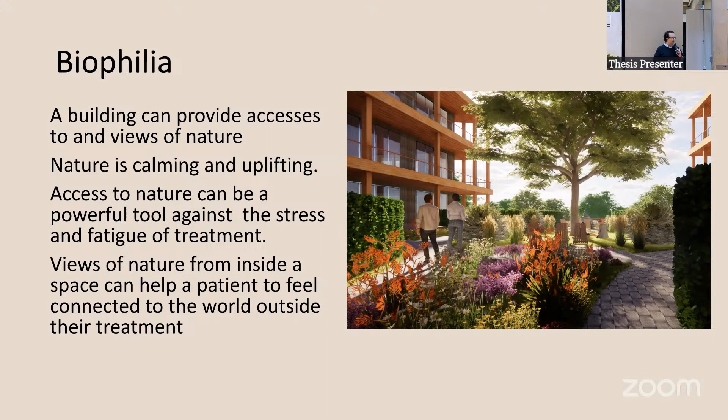We can also provide community space. Sharing your experiences with others can make difficult experiences more tolerable. Hearing about the struggles and successes of others helps patients realize they are not alone. Learning more about a disease and its effects can help a patient feel more in control.

The final thing I will look into is varied experience. If a patient repeatedly endures difficult treatment in a building, they'll begin to associate that space with pain and discomfort. However, if a space has both positive and negative memories attached to it, the negative reinforcement can be reduced.

This thesis is an exploration of a combined chemotherapy infusion center and community center for those undergoing cancer treatment. It will seek to bring together nature and community to have the most impact possible on patients enduring treatment.

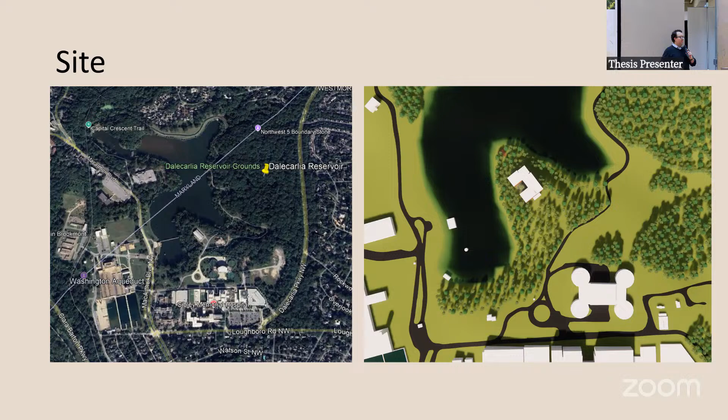This project is sited on the Dalecarlia Reservoir in the western corner of Washington, D.C. This particular reservoir has a wooded peninsula that sticks out into it, and that's the site I chose for this thesis. The building will get views of water on three sides, as well as being able to take advantage of the mature forest that already exists on the site.

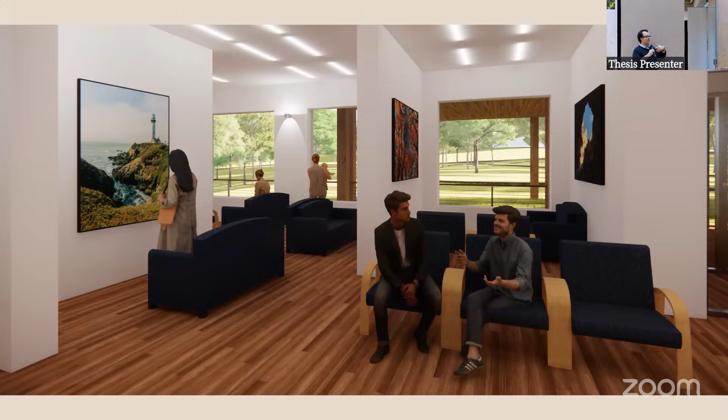The waiting room is something I wanted to be different from a normal waiting room. It's laid out as an art gallery, so instead of waiting in rows of chairs like you might be accustomed to, you can move about the gallery and see different pieces of art. You can look out into the mature forest, and sit in any kind of private or public configuration of furniture. This art right now is showing nature, but it could be any type of art donated to the facility, created by people at the facility, or rotating work by local artists.

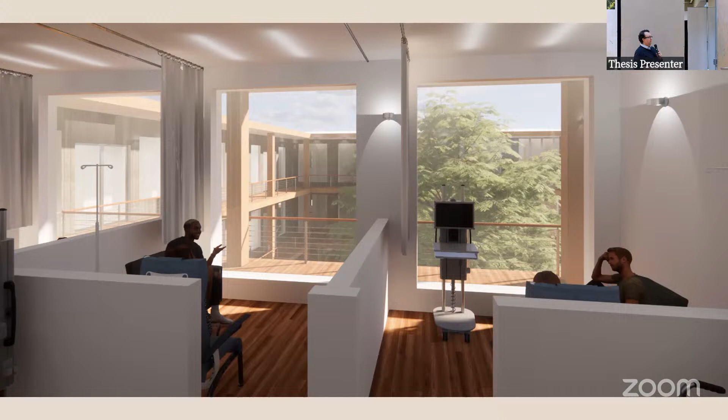You can see here that the spaces are facing out instead of facing in, like a lot of chemotherapy spaces are—out into the site, into the views of the water and the forest. Other chemotherapy units are facing into the courtyard.

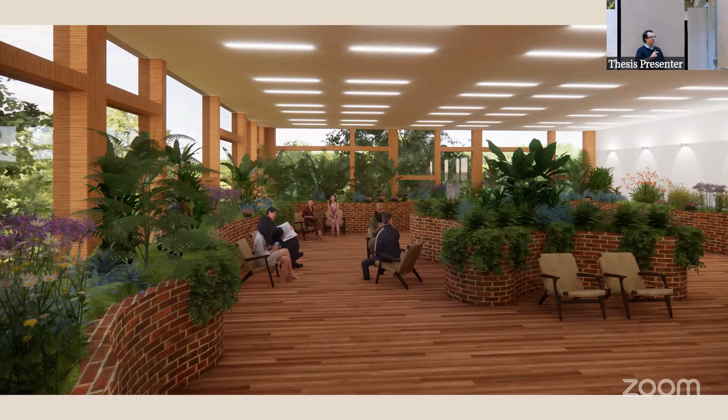We also have an indoor botanical garden, so if it's during the winter, or if someone cannot be outside at any time of the year, they'll still be able to connect directly to nature from inside the building.

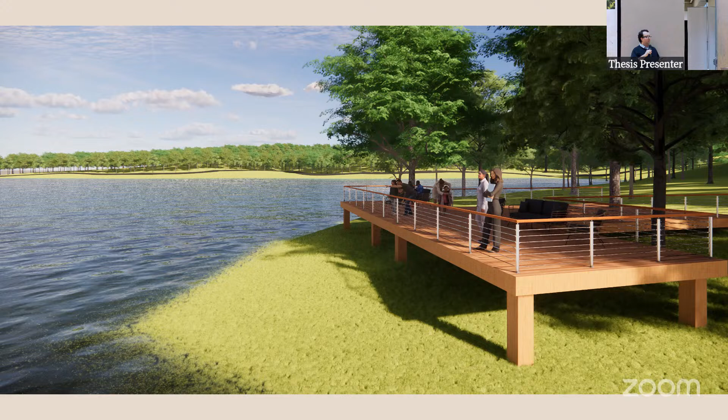At the very tip of the peninsula, we also have a boardwalk so that patients can move down there and spend time near the water.

The hope with this project is to provide a space that patients want to be in. If you need to receive chemotherapy treatment once a month, hopefully there can be events, classes, or group therapy that bring you in on other days. Maybe you come once a week, and only once a month for treatment. So hopefully 75% of the experience in the building is good and positive, and only 25% involves the negative aspects of treatment.

And now I'd like to open it up to your questions and comments.

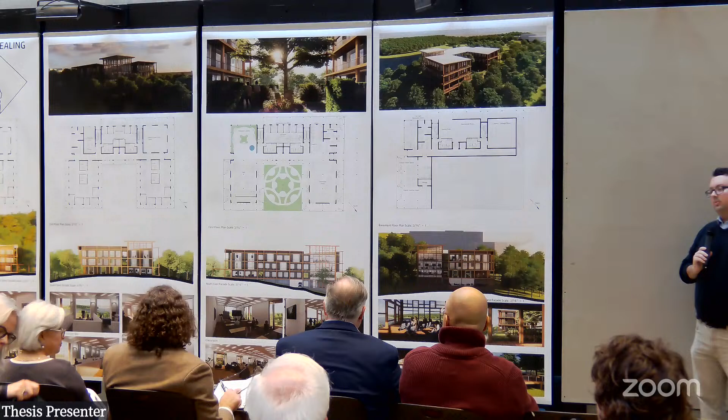Number two, I would like you to talk more about why the building looks like it does, from a planning perspective. I'd like to see some diagrams, some exploration of different ideas. You have a sort of rigidly geometric building, and I think you have some delightful things happening in your elevations, but you haven't really talked about that. And there's an emphasis on these interior renderings, which are quite good as renderings, but I don't think they tell me enough about why.

And that's the tectonics question maybe that goes to Matt's. Why does it look like it does? Why is it articulated this way? Great site, love it, thanks.

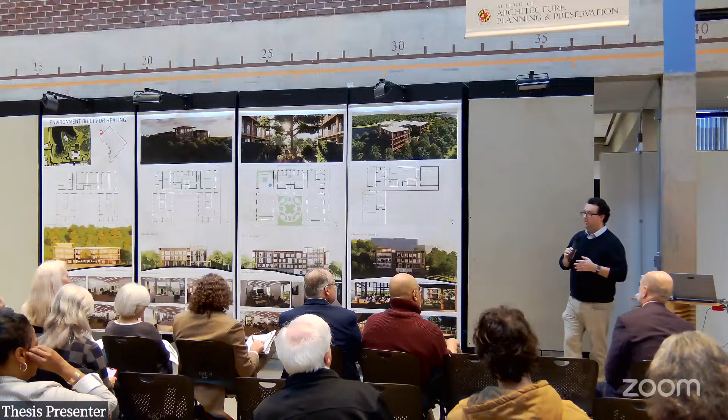In terms of my personal connection, when I was young I had a number of medical procedures, kind of minor, but it helped me connect to the idea of medical fear and anxiety. That's the main thing I wanted to look into, how to make a space that would reduce medical fear. And coming over my research, the thing that sort of begged to be addressed the most was chemotherapy. If you have to pick any one treatment, the one that has the most reinforced medical fear is chemotherapy. So that's the idea, to pick the function that can have the most impact.

So, the exterior expression - the building was designed from the core out. The idea is that there is a porch that runs all the way around the outside of the building so that you can come out and spend more time in nature from the majority of the places in the building, excluding the chemotherapy area - there's not enough room, it's a little bit larger than the other spaces.

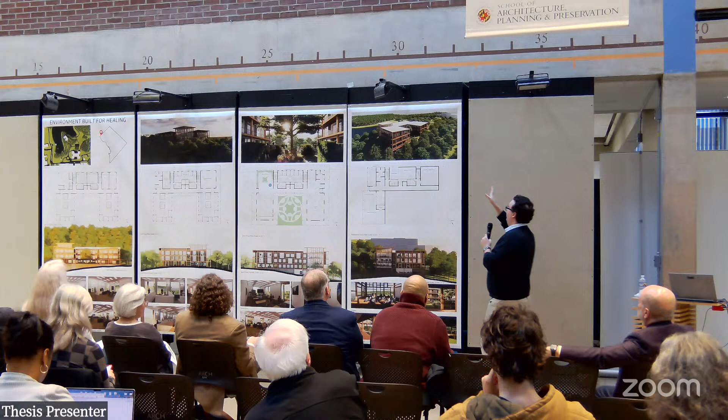The other thing is that the facade has a porosity to it, the way that there's the eaves and the columns. It creates an additional zone. So you have the nature, and then you have kind of a mixed zone, and then you go into the building, which I think helps mix the space instead of just having nature and then it ends at the wall. It kind of helps as a medium to bring the nature into the building.

Okay, I have a question for you regarding the typology. Is this a new typology that you're trying to introduce? A lot of the experiences I've had with people close to me, you go to the hospital to have your chemotherapy. Is this a new typology you're trying to introduce to ameliorate that experience, to make it better? And if so, did you actually talk to people? Did your research include people actually having chemotherapy, so you could design from that experience how they should be treated, and whether they want to be in open spaces next to somebody else going through the same treatment?

Yeah, so I spoke to a number of people. I didn't speak to somebody who's undergoing chemotherapy, but I spoke to a number of people who had family members who underwent chemotherapy, and they would be in the spaces with their family members and help them through the process.

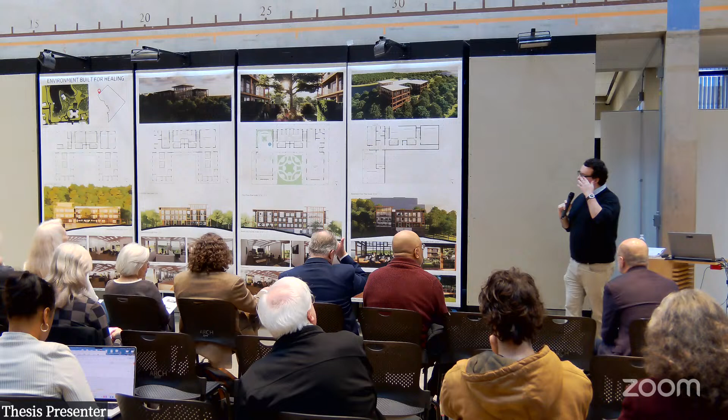And again, I got a lot of help from Robert Sands at Wilmot Sanz, whose firm designed two cancer facilities, both for Inova. One is the Schar Cancer Institute, which is a large medical building. And they also designed Life with Cancer, which is a very residential looking building that is just about the community spaces - they hold classes and community gatherings, this sort of thing.

So he had designed both, but he had not combined them. That is the new concept I'm bringing, the combination of these two things, as I discussed before, for reducing the negative reinforcement of having negative experiences in the space. I'm hoping you can have negative and positive experiences in the space to reduce the stress, so when you come to the building, you remember positive things and negative things.

And as I talked about before with the site, it's right near Sibley Hospital, and they have a very advanced cancer wing as well. So they can work together - they can be referred out to this facility from Sibley.

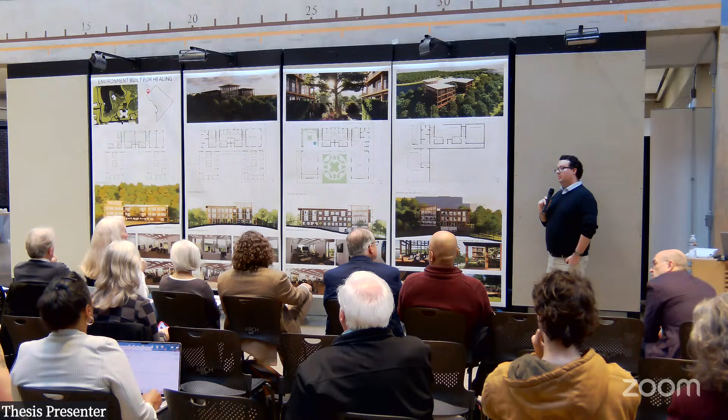Thank you for your presentation earlier. I will second something Bill said about process and diagrams. Yeah, they're beautiful and they tell a great story. I strongly recommend all students to not be afraid to write alongside your beautiful renderings and finished plans.

One thing I would have loved to see was a slightly larger pull-out, perhaps a regional view of where this location is, to get a better understanding of a patient's approach to the building and what's surrounding it. That anxiety sometimes starts before you even get to the chemotherapy chair, on that drive there, both for the patient and the family accompanying them. I'd love to have seen more diagrams on that approach experience, from the secondary streets, are you driving past the hospital, this large Sibley complex, and then coming into this more quiet, secluded area. Just something to show how those emotions someone might go through to get there.

And then also, getting to that front door experience, what is that truly like once you get out of the car and you're coming into the building? I see what appears to be an entry vestibule there by the check-in, but I would love to really see what that experience is when you're truly stepping through that threshold, right, from 'okay, I'm here, I'm checking in, let's go.'

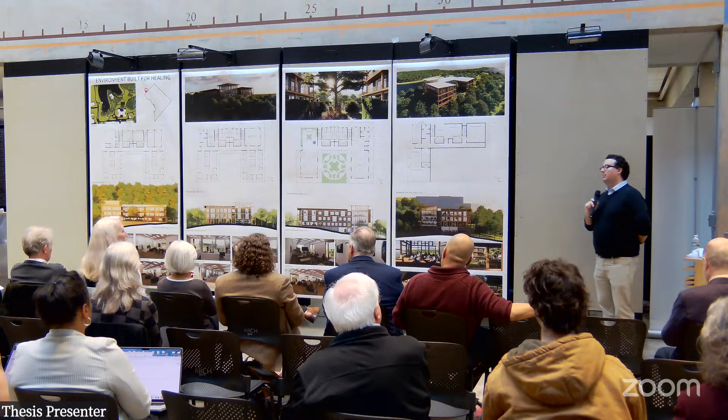In terms of the textures and the surfaces within the building, the main biophilia aspect is just the exposed timber structure. The remainder would be the different art placed throughout the building. I did try to work with some color in the chemotherapy bays for a while, but I ultimately decided that white was what was working best.

Paul, thanks for the presentation. If I'm looking at this one, I'll kind of buy it as this rather Schinkelesque palace in a wilderness. Would that it were so. However...

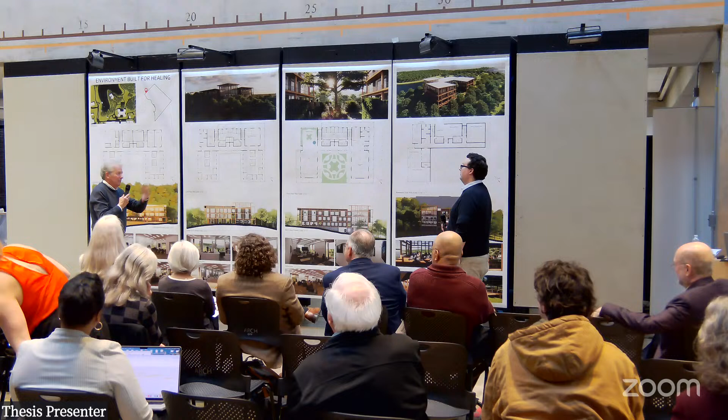I'm kind of interested, but I have a huge number of questions. I think it's important that you have an evidence base that allows us to be inherently sympathetic to the idea that there's a community of patients with forms of cancer who are prepared to allow a certain amount of intrusion into their therapy. Because I think the way individuals react to having something alien in their bodies is going to vary enormously.

Now, apropos of that, this is a kind of Beaux-Arts building. I know the facade is telling us something different, but if you look at the plan, it's got a bilateral symmetry about it, possibly slightly too symmetrical. Certainly if you're looking at the variation in how patients are going to react to cancer, surely there's an argument for saying there needs to be more diversity in the treatment rooms to accommodate the way different people react to this colossal intrusion on their normal lives.

I think that needed more thinking through and more consideration, because the person who may have no problem with a hip-height partition in the next space, there may be a person who thinks, I really don't want anybody witnessing this at all. I don't mind the idea of going to a centralized facility to be treated, but I don't want anybody to witness it. In that sense, I think the plan needs to be more nuanced, the section needs to be more nuanced, to accommodate that diversity of reaction.

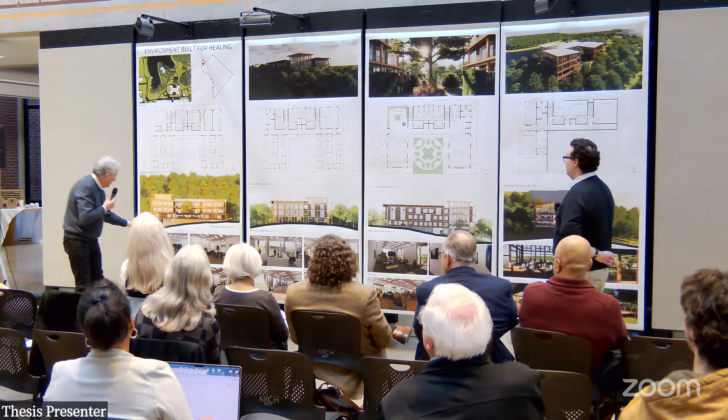Now, I get the water on three sides thing. What I don't get is the orientation. I actually would have flipped it through 90 degrees. There's a reason for this: when you look at the longer facade, it creates these areas of slightly nebulous wall here and here, which you wouldn't have had as an architectural problem to deal with if you'd flipped the thing.

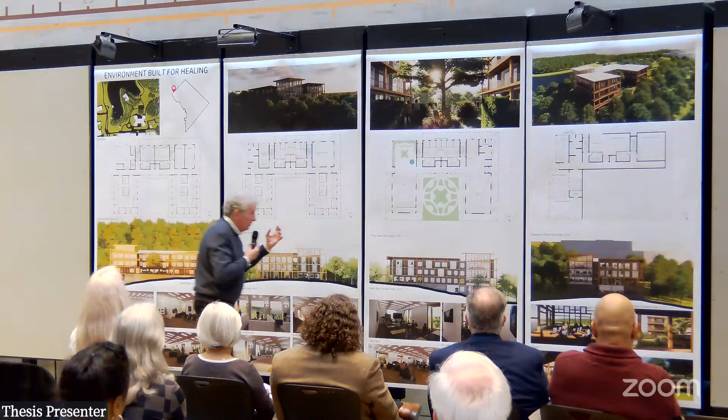I love the idea of immersion in nature. It's a wonderful concept, but you have to be kind of brutal in convincing us that these patients are immersed in nature. Putting it in a forest isn't quite enough, that's sort of like 6.5 out of 10. I think the way in which nature enters the building has to be more assertive. There's a danger that if things are only in planters, it kind of looks like the lobby of a corporate bank. It's probably about allowing nature into the building, but also orchestrating the views out by cutting into that forest, creating avenues.

You know, I'm English, you guessed. We created a vocabulary of the mansion, the stately home and the grounds, and the reciprocating landscape, that external landscape and the internal landscapes of the building. I think you needed to do more with the forest in terms of both sculpting it and allowing it into the building and adding to it to enhance that experience of immersion in nature.

Sorry, these aren't questions, they're observations. No, I appreciate it.

Thank you so much. The business of flipping the building is an interesting observation. I have the same impulse, principally because I think it would speak to the kind of layering of the site towards the water, that you come in and there's a very public side on one side of the courtyard and a much more private side on the other. The way it works now is that the entry pathway is a kind of line of fracture that suggests an equivalency between the two sides.

But in actual fact, I think the site is highly layered, from a very ordered system of Sibley and all the ER stuff in the backside there, to this natural business of the reservoirs. So I think that would have some benefit too. It would also help clarify some of the locational issues of things.

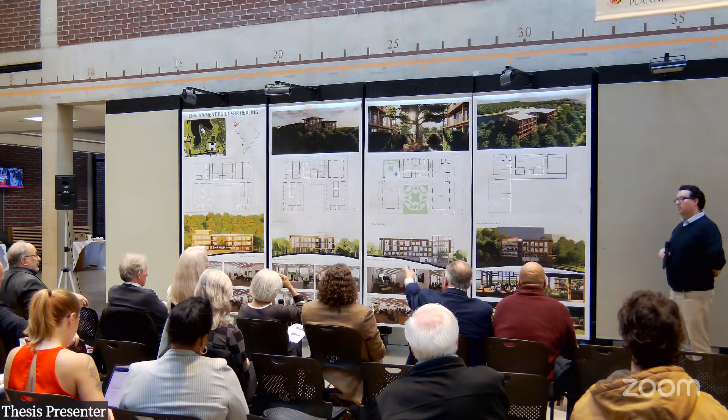A site plan would have been very good to see, to show that process and the experience people go through before they get to the entrance, and then maybe having a very welcoming entrance, which is not just the desk.

Maybe that's where you start incorporating some biophilia, some greenery, so people start to feel relaxed inside the space. Similarly, did you talk to people who received the treatments? Because I don't think they would want to be alone. You told me they are with their families, but in those little cubicles, they're alone, they're not with their families.

Sorry for getting here late, but just a quick look at what you've done reminds me of what Herzog and de Meuron has been doing with healthcare. That's a firm that became known for museums and art-related projects, but a lot of their work now for healthcare is mass timber construction, porches, areas where patients can go out, and how it embraces the landscape, especially this site you've selected.

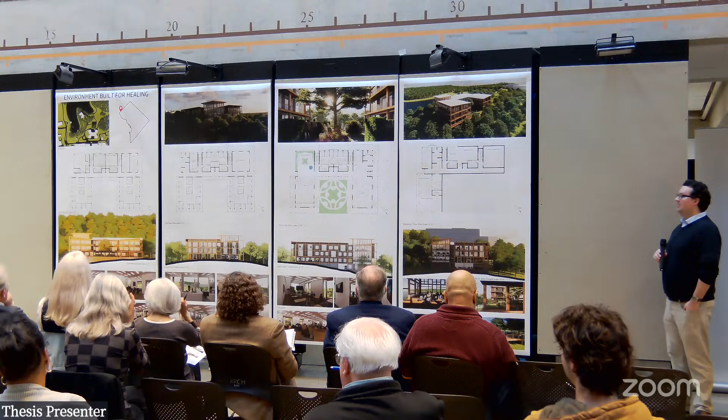Hi, Paul. Hi. First, I'll say that there's something really handsome in the fact that you tried to be very rational with how the grid sort of begins to organize itself on this site.

I note that when I look at the southwest facade and the northeast facade, I realize there's quite a bit of topography change. I wonder, since you didn't present your building sections, if there was an opportunity for this building—I don't work in healthcare, and I understand as few levels as possible might be better to get patients around quickly—but I wonder if the building could have stepped down or leveraged this topography differently. You've got 3 floors and 3.5 floors, and it could as well have been a flat site, and this solution probably could have been plugged in somewhere else. So that was just one thought.

The other thing, I'm closest to the 3rd floor plan, so that's the one I see the most. With the balconies, the earlier comment—most of the treatment rooms do not get to use that balcony, but maybe 1 or 2 rooms, the classrooms and therapy rooms, can. So teach me a little bit, because I think it'd be a little weird for me to be in one of those treatment rooms and see somebody walk back and forth. What were you thinking about the patient experience?

If you help Paul, I will take you to the club for lunch. And that was, for a lot of people, extraordinary. I guess it's all rubbed off on me now.

It's a normal thing. I would appreciate it if you would follow up with Rob and thank him, because I want to stress that series of encounters with Rob in September and October of this year was a huge game changer for Paul and his thesis.

Paul started off, he did his thesis prep semester in fall of last year, and he arrived at the thesis semester in spring with a site that was like a 300-acre park site north of here, which was ill-advised on the part of the faculty who critiqued him in 790. I'm being blunt. They should have done a better job narrowing down the site, because he could have spent the next two years just dealing with the site.

We arrived at this hypothetical site as a way to engage a pre-existing facility. It is in my mind that Hopkins would build this. Some donor would build this as part of the Hopkins treatment plan, and this would be part of the Hopkins facility at Sibley.

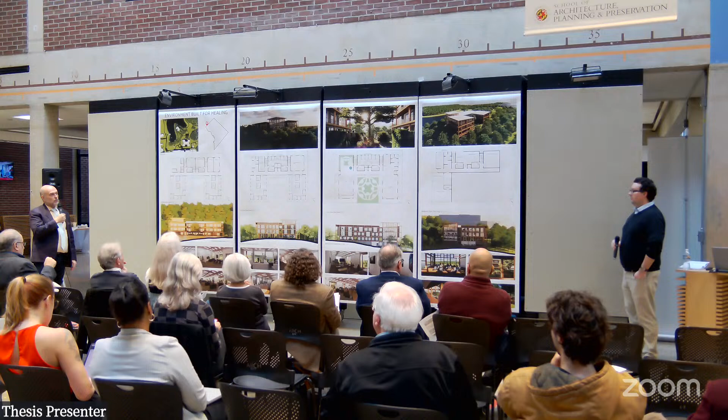We are going to turn and face in that direction, and our next presenter will also have a theme about healthcare.

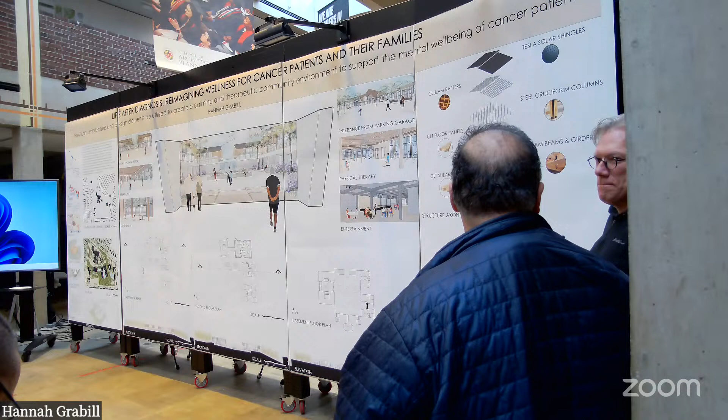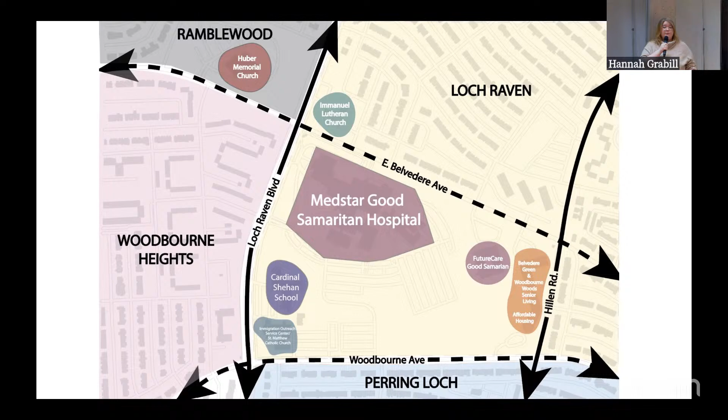But then you see this figure ground, and there's this huge mass in the center of this beautifully dense area. For me, the first thing I thought was, why can't we densify that? So instead of just placing another big mass here, my first thought was, let's go big, medium, small by densifying this area. I also did some analysis of the surrounding buildings—yellow and kind of yellowish representing residential—really showing how it's mostly residential with this big block hospital in the center.

Then I wanted to dive deeper, looking at the program of the site, seeing what's around, what program already exists, and how I could add to this site. We did find that the cancer area is brand new—they just built it. However, the spaces still feel kind of cold, white, and sterile, and we're trying to strive for a different way of designing that can stray from that.

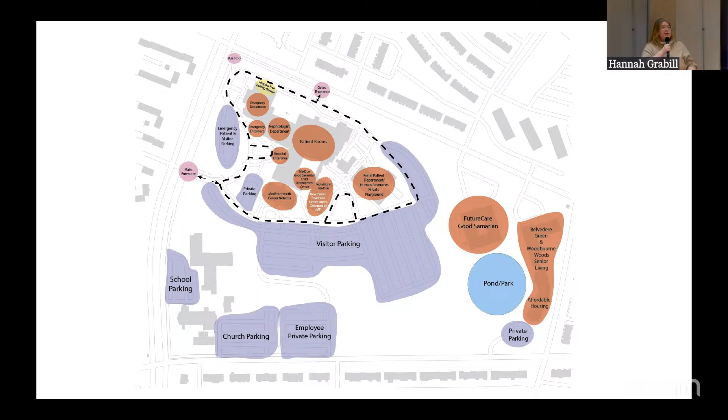Before I start digging into the project, I wanted to walk through it using focus groups, so you can put yourself in these people's shoes. One focus group coming to this site is an inpatient named Adam, age 39, whose cancer type is leukemia. He's coming to the site to receive treatment in the new infusion building, and he's been in the hospital for 4 days.

Then we have focus group 2, Aria. She's an outpatient, 23 years old, and her cancer type is gynecologic cancer. She came to the site to receive physical therapy and has come with her family support.

So talking about the first floor, the program really walks through different program types, mostly thinking about mental spaces, physical therapy, directory, and treatment spaces. I just realized I did not include the labels, but I can explain them thoroughly.

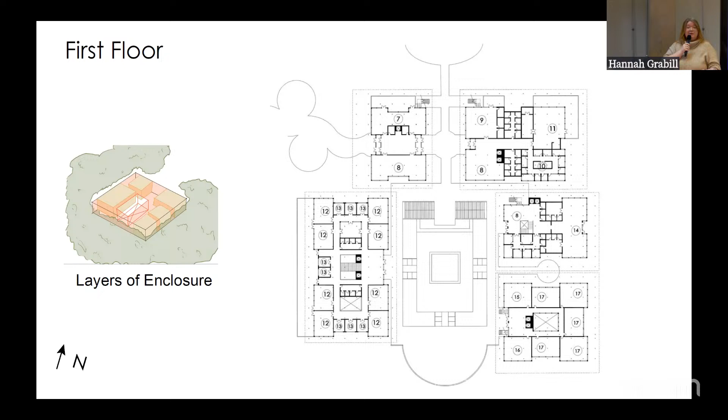And then something else I included was house living. So temporary housing was really important, especially for people staying in hospitals for a very long time. Considering the fact that we're right next to a hospital, I think it would have been great for families to have that option to stay right there in case of an emergency.

So on the second floor, we're walking through more of those spaces of infusion. I wanted the infusion spaces to feel like you had a choice. Usually when cancer patients go get treatment, you only have one choice and you're sitting around other people also getting infusion, and it's a very stressful situation. For this new infusion space, you would have an option of either an open floor plan, a cubicle, or your own separate space. But all of those spaces face outwards. Even the physical therapy and mental spaces always face towards the vegetation.

And then the last floor is the interesting one, with that big perspective in the middle, our beautiful public space. The basement floor is about family spaces. Usually during cancer care, family is kind of the last thought because they're usually in the waiting rooms waiting for them to get their treatment. It's a very long process, and it can be very stressful for them as well. So by including spaces for the family, such as entertainment spaces, a food court, and different programs for maybe teenagers to come and hang out, this allows them to not just have to wait in a waiting room. They can go and enjoy themselves while their family member is getting treatment or therapy, whatever they're here for.

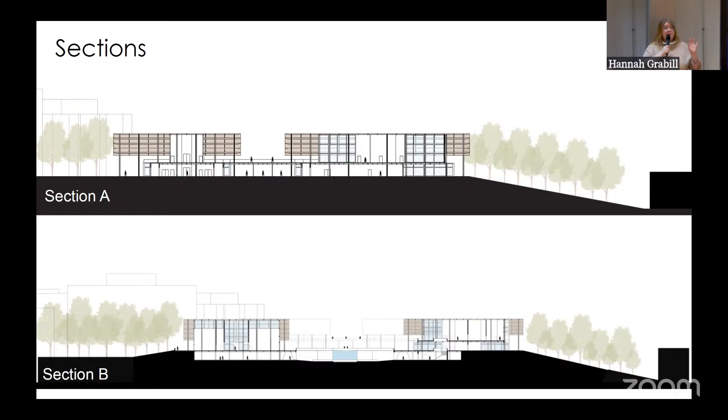And here's that section, looking at that gorgeous big space in the middle, cutting into the groundscape, and those buildings with the canopy roofs extending outward.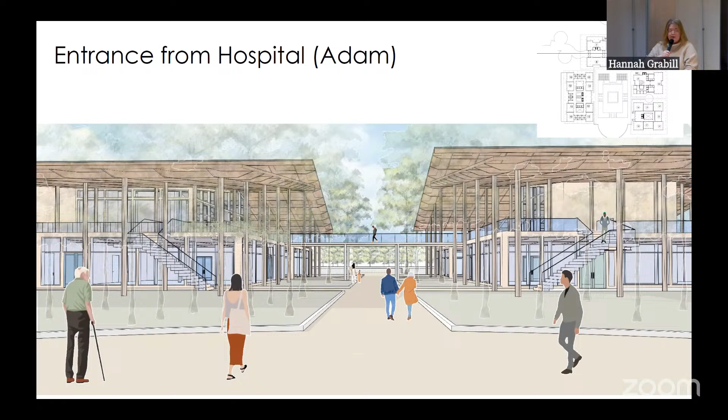Next, we have the infusion space for Adam. This is what I was talking about with having those different options. You could have these half-walled spaces that are more open plan, facing towards nature. Or you could have cubicle spaces on the side, and behind those would be individual rooms that are still open but more private so people can't hear you. Within the space there would be nurse stations so patients always have that look-see access to a nurse if they need it.

Next, we have the meditation space. Through research, meditation has been shown to really help with stress. It's one aspect of the mental building, which includes mental therapy, group therapy, meditation, and other varieties and choices, because everybody's different and uses different coping mechanisms to calm down. Meditation is a great way to ground yourself, especially after receiving treatment.

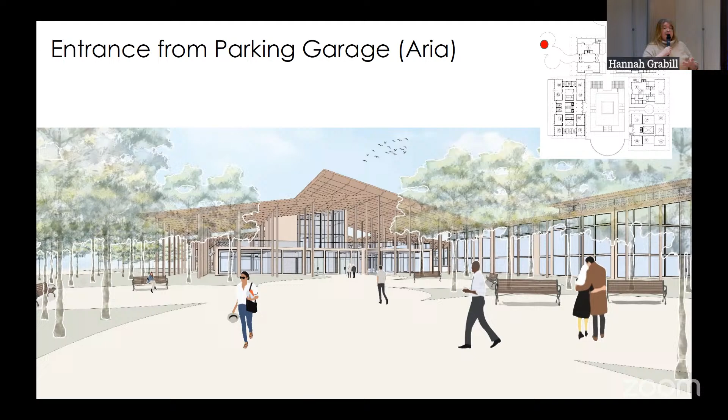Now we're going to move on to Aria. Aria is our outpatient, coming from the parking garage that's now provided on site since we're taking parking spots away. This also acts as a threshold, but now we have nodes on the side for people to sit and enjoy nature as they walk into the site, taking their mind off why they're here and focusing more on enjoying the space itself.

Next, we have the physical therapy space for Aria. Anything dealing with therapy always faces towards nature - that's always what you're looking at. And anything to do with waiting on site, like waiting rooms and terraces, looks into the family space in the center, so while waiting you can remind yourself it's going to be okay, I have my family here. It's going to be good.

Last but not least, the big perspective of our family space, the heart of this site. By making this family space the heart of the site, it reminds us that family is kind of the reminder to keep us going, for cancer patients to keep fighting. It almost inspires and empowers them to keep fighting through their battle, and that's why it's the most important perspective here. That is it for my presentation, and I look forward to hearing your comments.

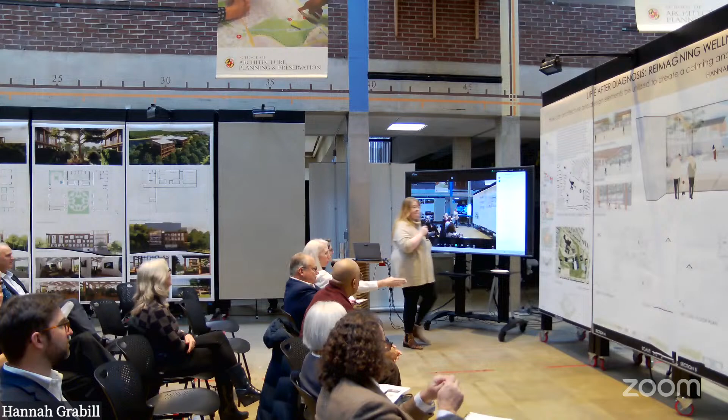Thank you, Hannah. Oops, I went. Here, one second. Sorry, I'm just trying to relate that last perspective that you showed. Would you mind coming out? Is that from the bottom page looking up into your open space, that last vision you showed? So if we go over to the ground, you're basically looking from underneath the bridge, looking outward. There's a canopy right above you that kind of wraps around the entire space with spaces right underneath as well. But you're at the very end, looking this way towards the stair.

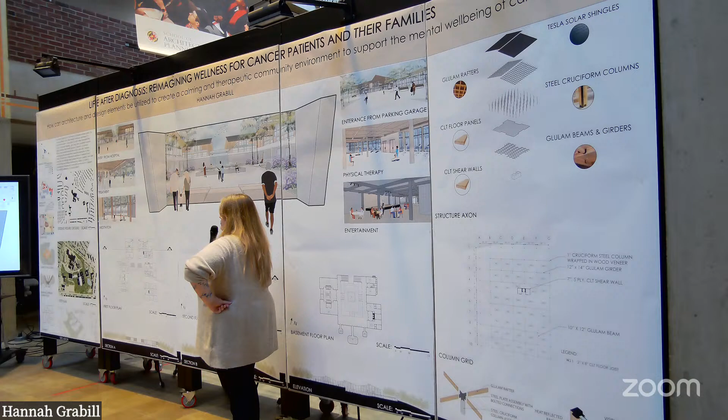So if you're Adam coming from the hospital, or Aria coming from the parking garage, you're coming in at first floor level? Yes, that would be there. So if you then turn to the open space, you're actually up above? So do you see that space at all as you're coming in, or do you have to progress in and make your way down? I just want to make sure I understand your section here. Yes, so this space would be something that you would go to yourself - it wouldn't just be accessible from the entrances. We have two options: either taking this grand staircase that's attached to this big water fountain, incorporating that water feature to calm them down, or if you have other needs and aren't able to take the stairs, we have multiple elevator options through these three buildings that you can go down to that level as well.

I like a lot of what you're doing here, the spaces and the way you've placed these buildings in the landscape. But I would appreciate it if you could get more physical for me - just show me exactly when a person comes in a car, I come through here, this is what I see, and then I decide where to go, and I have these options. When I come from the other side, whether it's Aria or Adam, this is where I see and where I can go to other things, because it will make me understand better how you organize these. I do like the spaces that you have, I like the way that it was sited, but I'm missing the people part of it. Yeah, okay.

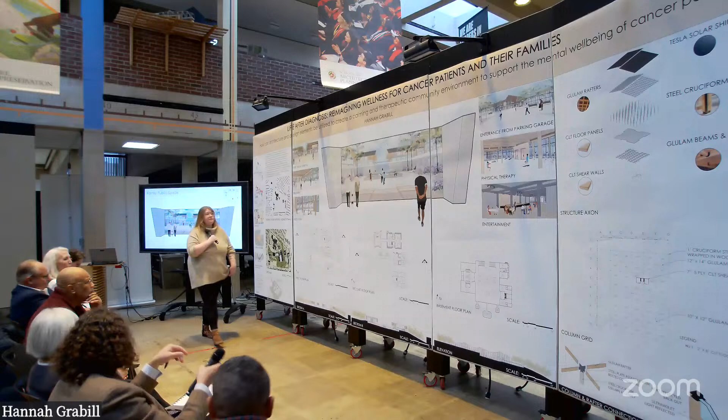Were you going to describe that? Did you want me to? Yeah, I think it's a good request. Sure, yeah, show us how to get there. Did you want to walk through with Adam or Aria? Do we have a preference? You choose. All right, let's take it with Aria a little bit.

So we're walking from the parking garage right over here, which you can see from this little axon. Once you walk into here, you see a bunch of little nodes on the side where you're able to sit, and you walk right into the directory building where there will be a desk right here where you can ask which building you need to go into.

For her case, she needs to go to her physical therapy appointment, which is in this pavilion right over here. Once she gets her number and figures out where she needs to go, she goes with her family, enters into the next node and threshold. Then she walks over here, turns, and then she can enter the building through here.

However, if she's trying to go down to the family space, she can just go straight into this lookout point and take the stairs down, then walk into this pathway. So it's basically a covered pathway the entire way around. The only time it's open is right here.

Yes, there's a wall right here of masonry, just to provide this cave-like experience, since more light wood and steel construction is up above, and down below is more concrete masonry, so it feels more grounded, like you're within the ground. So keeping that idea, it's providing another threshold opportunity for you to feel like, oh, I'm walking into something different, a different experience. So it's not giving it away quite yet until you turn that corner.

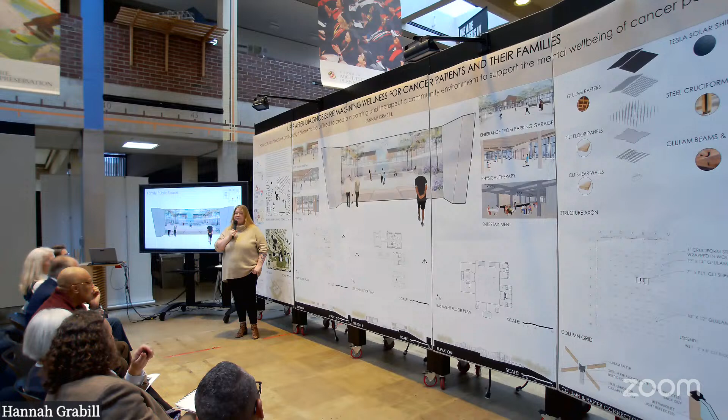Hannah, I would say, looking at the size of the Samaritan Hospital, this project is enormous, what you've taken on. I might even go as far as to guess that your building 3 is probably the size of what Paul just presented. So there is a lot of program here that you're trying to solve. Bravo for biting off such a large project.

I guess I would offer that it sounds like your decision, or your thesis, is really trying to provide an experience of calm for people facing probably one of the worst diseases in modern life. And so I love your high dollar space for the family, and I would be interested long term in understanding if you had time to talk about the experience of going from check-in to which pavilion, because if I don't know where I'm going and I'm dealing with treatment, I could still be lost, and how do you manage or help a patient with that type of anxiety?

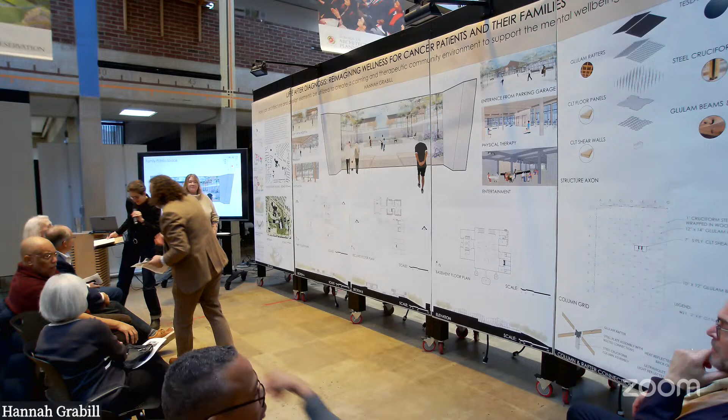Yeah, this is a huge project, so commendable on the subject and the site. I have some related questions.

How long does it take if I'm walking or rolling in a wheelchair to get from the parking garage to the entrance? It's a pretty distant walk. It would definitely take a minute. That's why there would be nodes to rest. Sure. So, as these are cancer patients who sometimes have trouble getting to their mailbox at their house, having some sort of electric vehicles that can shuttle people back and forth might be a really good option, and providing for that in the design as well.

I think your question about the experience of when you see this internal space - imagine if you're coming in, first of all I do ask about wayfinding, like is it really clear when I've finally gotten to the entrance which building I go to? So wayfinding is going to be key. Then I turn here, and rather than seeing a wall, what if I see a water wall? And I immediately know that I and or my family can go to this space. So I think the big reveal, rather than hoping that someone is going to go around the corner either side and then, ooh look, that's kind of the big reveal right away.

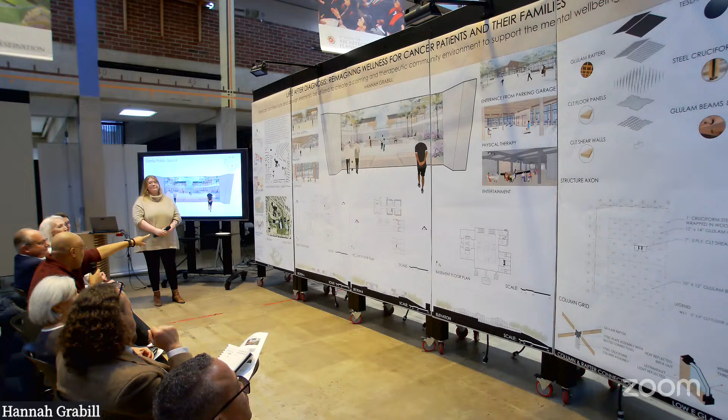What I also like, not unlike the previous one, is the residential attitude in the massing and the materials and the CLT and all of that to counter the hospital feel - the wellness and what happens afterward when you're stuck there for your rehab. So those were really good choices, I think.

So the parking - like I said, it was more of a challenge to really quantify where all that parking is going, because the parking is for the hospital also, not just for your facility.

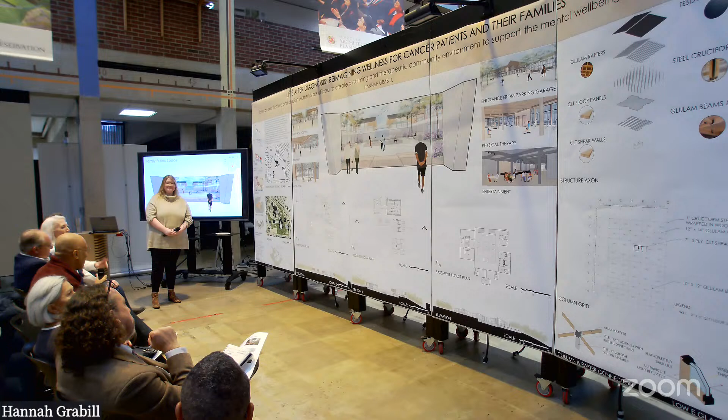I think maybe a diagram could have been added - thank you for showing the analysis here, it's very helpful. One more diagram that potentially could have triggered some thoughts would be a sun diagram across the site. East and west facades are two of the hardest to control glare.

A lot of times, healthcare is not my forte, schools are, but we face the same issue - learning environments, stress, glare. Looking at the sun path here, one idea potentially, what if this building rotated 90 degrees to be more north-south, where you can have more open windows without all the sunshades to help control that glare.

And thinking about that, that would rotate your entrance slightly more toward the area where you have the parking garage. Again, thinking about placement on the site - is there a central court that can both bring the entrance closer from a mobility standpoint to where someone might be parking, allow a family member to drop off, and have close proximity to where they need to park to catch up with the patient.

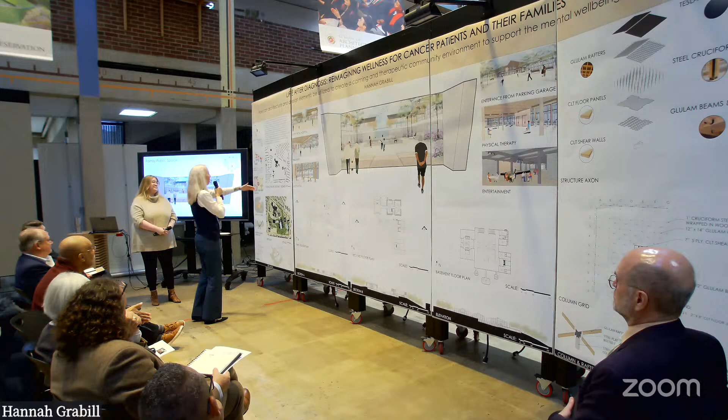Potentially playing off of this existing waterway, are there then options to kind of open up that view also? I love the idea of the waterfall - the sounds, the acoustics, the healing that it creates. But is there also an opportunity to create this beyond-campus aspirational view, that this is ultimately my goal - to be healthy, to be out, and to be back out amongst everyone.

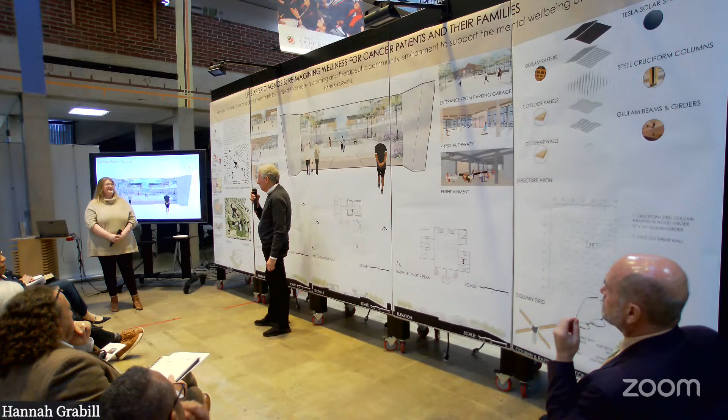Hannah, I think you'd be a very effective presenter in a practice because, in the heat of project presentations, where the developer is thinking, I'm not going to spend $100 million on this one, and the designers are thinking, is he or she going to buy it? They could wheel you in, you'd bring the temperature down. This is a good thing.

It's a good thing. But I'm sorry, I'm a Brit, I'm not particularly kind. I don't necessarily always exist in the orbit of saying kind things. I do think there's a soundtrack here, but maybe the movie isn't as compelling as it might be. And I think the things you've done well, this connection into this infrastructural logic, I think works.

I think this is good. I think you've worked hard at producing every last cleaner's cupboard and Belfast sink and mop cupboard. And I think all that's good. So it's very forensic, and I admire that.

Now, the difficulty, I think, is one of scale. And I just instinctively feel this is too big. But it's been drawn in a way that makes it smaller. And I find that really, really interesting. I think in your mind, you got in your head a scale of spaces, which is not actually borne out in terms of the reality of the building.

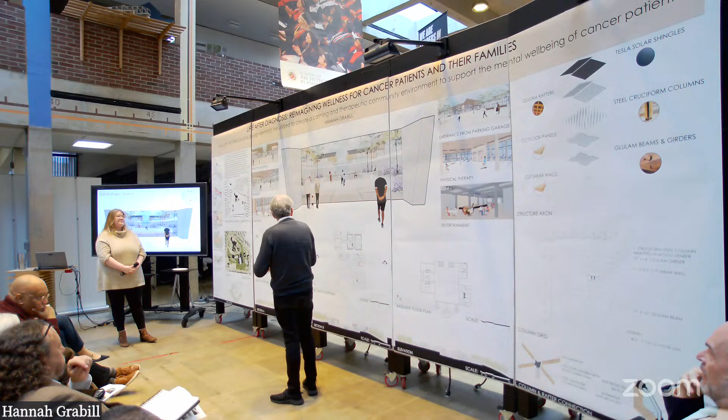The other thing is the weather here is making me feel right at home. It's just like being in London. It's humid and it's kind of rain and the streets look kind of uninviting and so on. I'm trying to think what this is like when it's wet.

This is the star. This is Ava Gardner in Flying Dutchman, or whatever the movie's called. You know the movie, James Mason, Ava Gardner, beautiful movie. This is Ava Gardner, okay?

These somehow need to interact with it in a way that's believable. And it may be that actually this is in the current depiction - I think it's under designed. I think it's under designed. I think it needs to have some areas which could be covered.

I think these need to impinge upon it. We need to know what's going on here. And also, actually, this is kind of, it's big, but you've drawn it in a foreshortened version of what the reality is. I don't think this is it.

Don't believe it. And I'll be a bit unkind. I don't think you draw as well as you should do to match the aspiration of what you want the building to be. These need to have a grain, a textile, a texture, a materiality to them, which is compatible with the aspirations you have. So there is, to me, a mismatch between what you draw and what you aspire to.

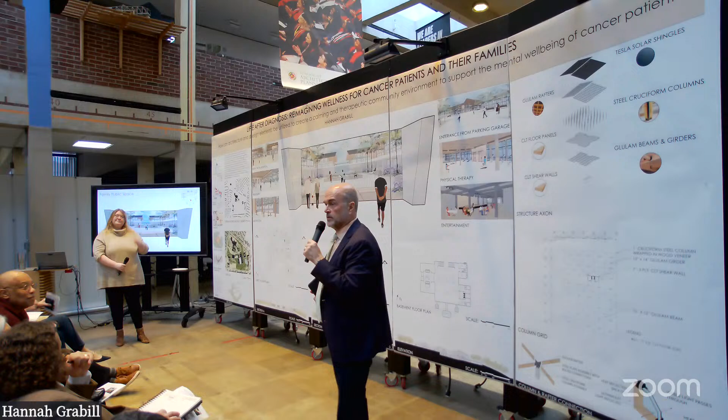I think we had a really interesting discussion, and we were eventually able to get down to the brass tacks of your design and how to go about this vision. I think everyone's on board with your vision, and this comes from a deep place in Hannah's heart and experience. She has deep compassion for this. I think maybe one thing to take away from the way this presentation went is pretty quickly in a presentation, you can move on to technical aspects, to the physical and concrete elements, and even your design principles. Maybe there's a way to be more specific than those three sort of generic design principles: comfort, etc.

You wanted communal space to face towards the court. You wanted contemplative individual space to face outward. That's a concrete design principle. And you had others that I didn't think quite made it into the presentation.

One of the really interesting things about the discussion was scale. If you kept working through this and tried to reduce its scale and make it more intimate, I think you'd find wonderful solutions to that problem of making this space less stressful, which your scientific research showed. Stress is actually directly deleterious towards progression of cancer. So that's really the game right now, and other cancer centers are trying to address the same problem, but you're well on the way towards some new solutions. So well done.

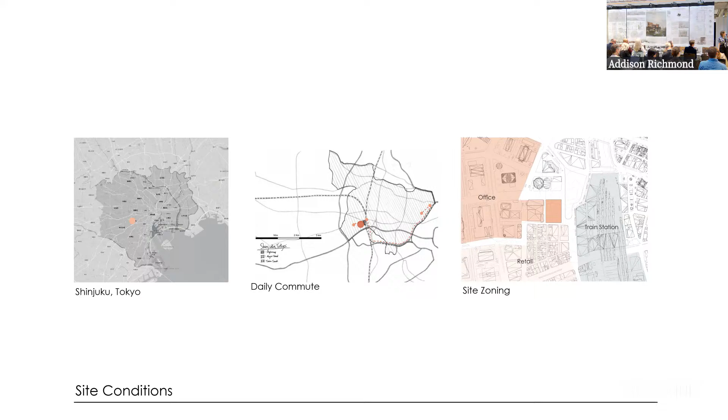Let's first consider how the office environment is affecting individuals to make this decision. Starting out in Shinjuku, Tokyo, located towards the center of Tokyo, the site is located directly adjacent to the Shinjuku train station, the busiest train station in the world, and is flanked by office spaces towards the north and small retail towards the south.

The buildings around vary in size, but it's fairly devoid of any green spaces. Therefore, the introduction of a restorative, sunken, Zen-style garden could be a great opportunity for individuals to reflect, pause, and engage with their environment.

Utilizing a strong linear path through the center of the site, individuals could be encouraged to engage with nature and observe and view the surrounding area, pausing and reflecting on their daily commute to work. The sunken garden allows for a more secluded and peaceful environment, while the backdrop of a mass timber constructed office building serves as the perfect backdrop to this garden space.

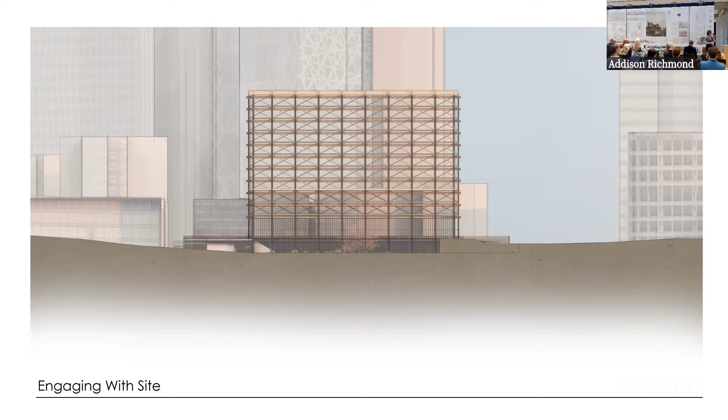Along the street edge of the site, small restorative rooms based on Japanese tea rooms can be introduced to encourage individuals to pause even longer if required. Instead of simply sitting at one's desk during lunch hours, one could engage within these individual spots, very much like a tea ceremony taken for themselves, giving them the opportunity to reflect, pause, and spend time looking out into nature.

Each of these tea rooms represents a different arrangement of the tatami mat system, and each of the windows is oriented to give you a separate view of the garden space, allowing individuals to have a unique experience in each of these restorative rooms.

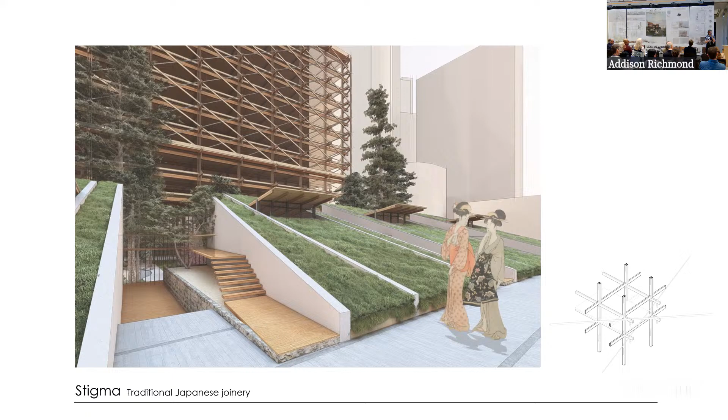The garden is featured as the central piece of this project, being directly located in the center. It can be observed from above, but can also be circulated down into for those interested in a restorative walk. Even from outside the site, individuals can catch glimpses of the garden itself as they walk along the street edge and are able to see the mass timber construction in the distance of the office building.

Sunken Garden also features a community space at the base of the building towards the garden, which allows individuals to enjoy after-work activities rather than just rushing back to their apartments.

Mass timber is utilized not only as a kind of homage back to the forest itself, but also to reflect the traditional Japanese joinery that we see throughout Japan.

But even with these steps taken in the city itself, individuals will still most likely have issues with their mental health. Therefore, a secondary site located within the Aokigahara forest, the location of many of these suicides, is necessary.

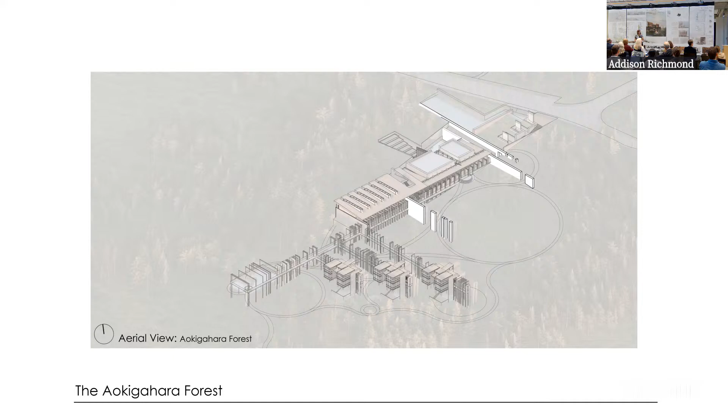As mentioned, the Aokigahara forest is very dense. Therefore, including a strong linear path throughout the site is used as a way to organize individuals and to give them direction and meaning throughout their experience on the site.

Individuals are encouraged to observe the views throughout the site and throughout this linear path as it changes while they walk along the path itself. Featured on one side are the buildings of more communal spaces, such as a visitor center and a workspace. And then to the other side, the Zen garden is allowed to create a microcosm of views for the individual to reflect.

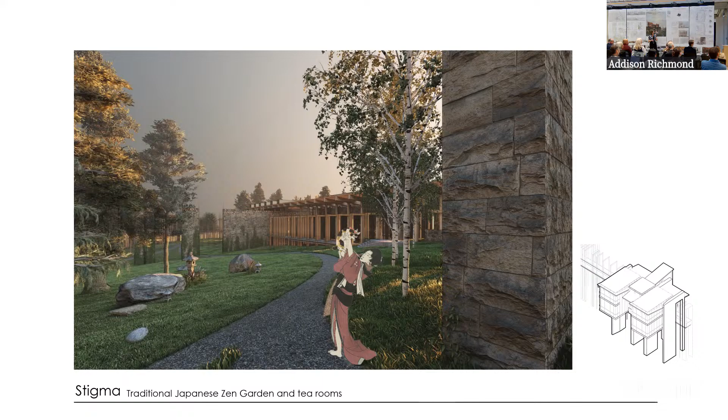While the collective is emphasized on one side of this linear path, the individual is also emphasized towards the other side. These restorative hoteling type spaces are provided for individuals that have to stay an extended period of time or seek to stay here to reflect over a long extended period.

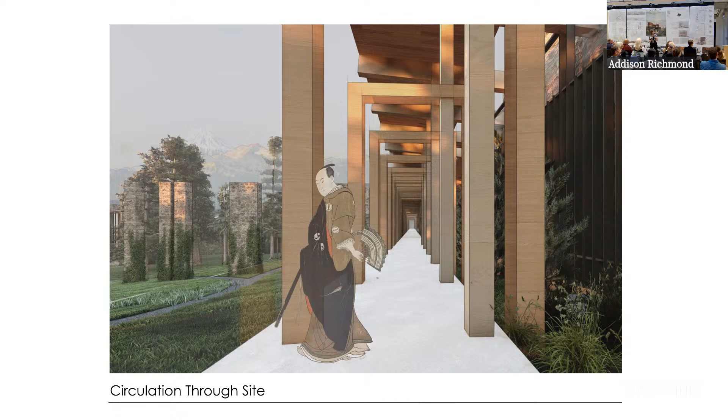Once again, based on Japanese wood joinery, wood is used as a way to connect individuals back to nature as they progress along this path.

Topographical changes also allow individuals to engage further with the site. At the beginning of the procession, individuals are encouraged to walk down the steps, engaging with the ground physically. And as they progress more and more, the landscape drops down further and further until the point where individuals are engaging with the trees themselves, are able to see out into the landscape and beyond to Mount Fuji.

Throughout this presentation, I've shown how things like traditional Japanese joinery, views out into nature, and specific circulation patterns that encourage individuals to engage with their site can be utilized to improve mental health. Through this, we hope that individuals are encouraged to reflect, pause, and consider untangling the sea of trees. Thank you.

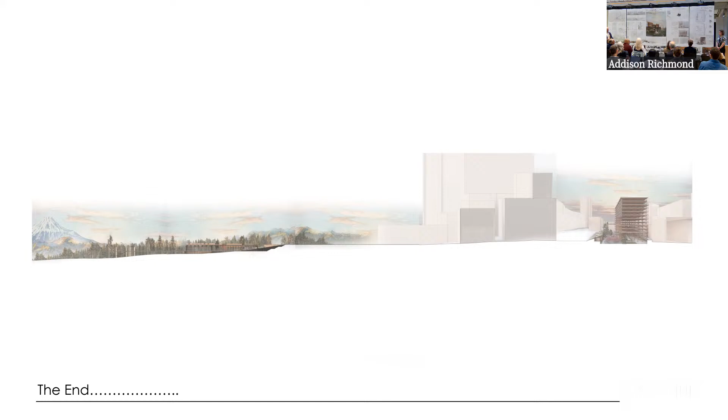This building or both? The answer would be both. It was a desire to understand.

Perhaps you could just take us through the second building. I understand that you've got individual pods for an individual experience, but maybe some of the other spaces, so we understand perhaps as a support building, a building of refuge or further contemplation about life. Then how does the person coming here by bus or by train engage with building 2?

I think that is actually a very key significant thing to emphasize, where you said preventing. The office space would kind of be seen as a preventative method, versus this would be more of a response to when an individual can no longer be prevented from their ideas of perhaps completing suicide, but instead it's one last option to encourage individuals to pause and reflect before making that decision.

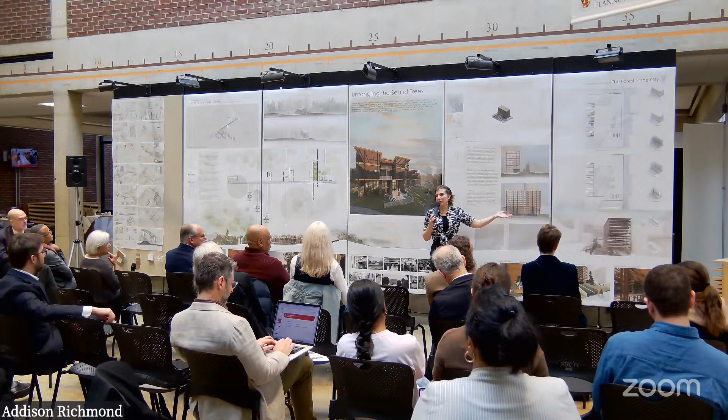So whereas the city would be seen as a preventative method, trying to encourage people before they're even suffering from depression or suicidal tendencies, how can we change an office environment to encourage positive mental health? For example, with views out to nature, using materials that encourage more tactile experiences, more natural daylighting, preventing suicidal tendencies from even occurring. Whereas on the site itself in the Aokigahara forest, this would be more related to what if the preventative methods are not fully effective.

They're separate. Yes, separate programmatically and in site location, but similar themes. Addison, thanks very much. Look, it's conceptually very rich.

You've brought sketches, thank God, and you've also brought intelligence to this incredible social issue. Interestingly, even in the UK where I come from, the primary cause of death among males under 45 is suicide. It's a Japanese problem, a Korean problem and so forth, but it's actually a global problem. So there's an incredible poignancy and relevance to this.

I don't understand how the 10-story piece relates to the rest of it. I'm not sure I really care, because you talked about it being somehow some reminiscence of the office environment. I've been to Shinjuku quite a few times, it's a very intense environment. Just on the edge of it, as you know, there are all those kinds of bars where the salarymen and women get absolutely mullered in the evening and then fall asleep on the pavement and never get home. It's a crazy car crash of stuff going on.

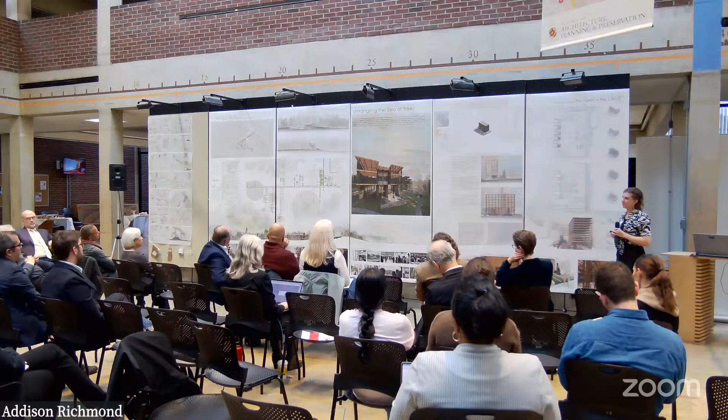So my interest would be, if you take this on further, I could see a whole doctorate in this. If this is a new form of office building, what I'd love to see and hear more of is how the spaces within that building, since they're rendered as open floor plates, differ from what these young men are experiencing.

What is the theory behind how space is allocated per person, instead of the long linear, person-by-person layout, which looks like my office right now? I'd love to hear more about how what you're doing within the building helps alleviate some of the stress that comes from the physical layout and the either too-close or not-close-enough proximity these workers engage in every day.

Because once you get out into the working world, you also have to be able to, as a developer or architect, sell why you want to make a change. If a city is the way it is because there's a financial model that works, that we pack people into small apartments and into offices, that's what's driving development currently.

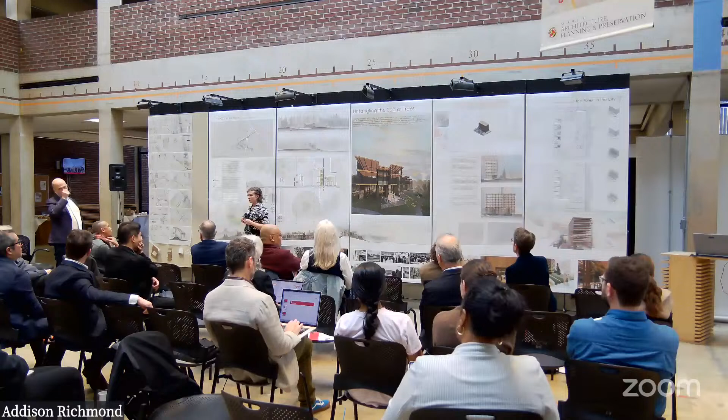The headline is this: if you number these panels 1, 2, 3, 4, 5, I think it's less of 4 and 5 and more of 1, 2, and 3. I would agree, your heart and the passion for wanting to address this really difficult issue head on, I think no one is going to deny it. It resonates in your voice.

And I would really be interested for you to think about how this visitor, this experience functions, and really get into the spaces and think about how you want your audience to react and engage with this. I look at some of the sketches and you go from sort of a solid arch, which might be kind of an idea of embracing and support, and then you dither that spacing of that arch, if you will, into a modern arch. I'd love to know what you were thinking about that.

I would love to hear things like, okay, therapy in the Western context is not what happens here. So I'm imagining now things like, you come to this building and before you go into nature, here's a grove of trees, and these are the trees you expect to see when you're on the outdoor path. And maybe you're telling people to, while you're here, appreciate that you may not come here every week, but there's so much around here for you to see the next time you return. And you spend some time to really tell us, and tell yourself, what happens in this lovely building, what experiences do you want people to have.

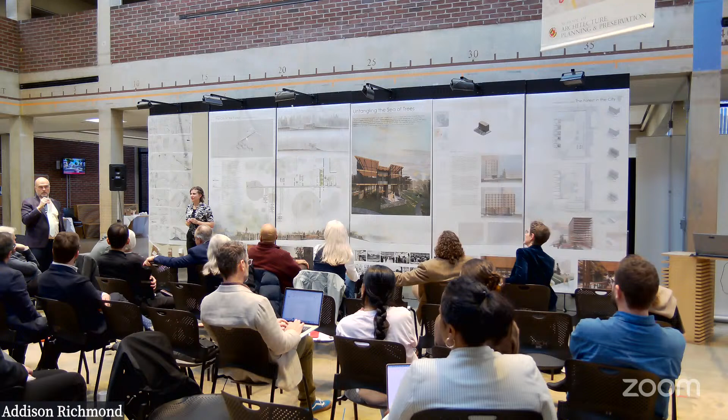I just want to say, before I hand the microphone over to Peter, as the person who has seen all of these projects, that the process Addison used here—this is just a fragment of the material she generated by hand. Her process was to draw, to model, to put tracing paper over the top of the model, to draw, to diagram, to remodel, doing the same thing over and over as an iterative process, which is what architects do.

We don't just sit there and say, well, Revit made me do it, or SketchUp made me do it, or the component warehouse made me do it.

Throughout this, every single day that I sat down with Addison, there were new precedents, new things. It was one of the richest experiences. I'd usually see her after lunch, and this was like having a second lunch or a dessert afterwards. There were things to think about and talk about.

In my mind, listening to you guys, there's a difference between making a building and making a proposition that carries through the idea of a thesis. I've very much felt that through the course of this project, that this is a project that carries through the idea of a thesis.

I hope I didn't steal any of your thunder. It was perfect. You already mentioned some of the things I wanted to say, so I don't have to say them twice. But I really want to thank you, Addison. And David, I could not have said it better. You brought sketches and intelligence to us this morning, and you sponsored a great conversation. That's wonderful for a thesis proposition. I think the comments were very well taken.